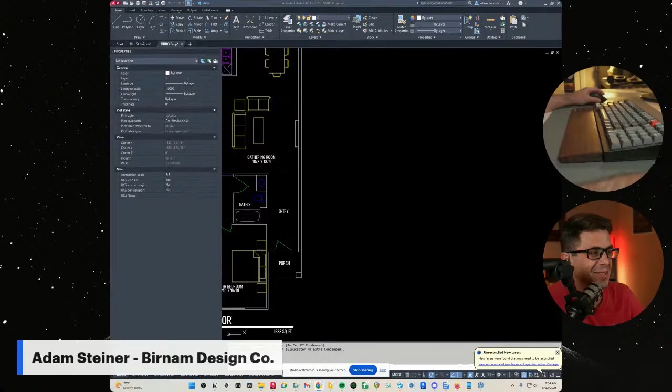Hey, for those of you jumping on Instagram, thanks for jumping in. Good chill morning, I actually just woke up. I didn't set an alarm today and figured, I don't know, my family's usually up pretty early, so it kind of just wakes me up by osmosis. But yeah, I didn't get up till like, I don't know, 7:45.

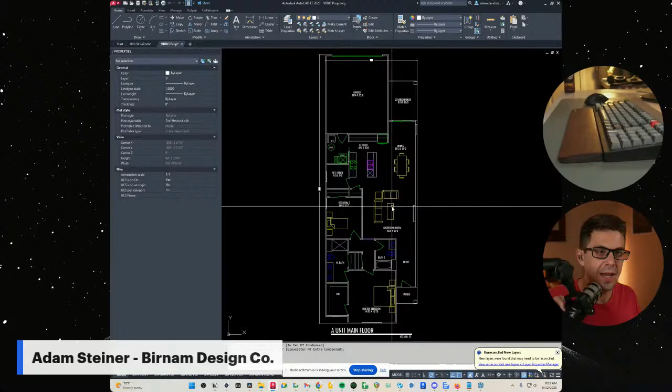Getting ready to start a new kitchen layout for a client. I assume, so I get a lot of requests for remodels and stuff for kitchens, and it's really hard to do remotely, and they're just generally hard work. Like with something existing, it's harder than something new, for whatever reason. So mad respect for working in new kitchen layouts, unless it's just a new plan, just you're a kitchen designer, which is entirely possible.

How do I see the chats in Restream? I swear I've done this before. This isn't my first time live streaming, I know how to do this, I think. All right, I need a sip of coffee, I literally haven't had any coffee yet. Did I say I just woke up?

Okay, today what are we working on? Glad you asked. I have this paired patio ranch plan, this is the one up on the screen here, or Rambler as they call them in Minnesota. And the original version was to pair this alongside a 2-story home. And that worked, and it led to a pretty cool looking building. But I don't want that up. Oh, where's it? Okay.

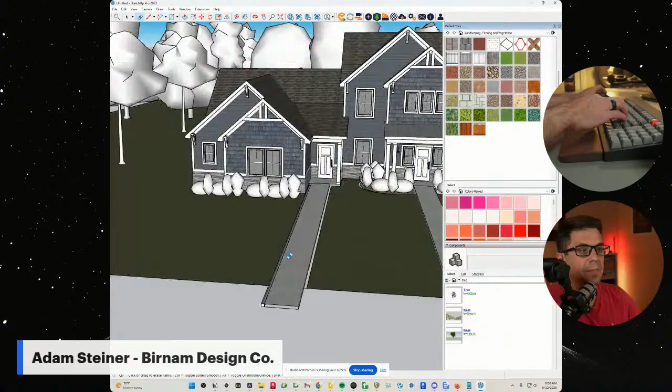All right, so this is the 3D of what we had. You can see here the ranch plan paired with the 2-story. Personally, I like the look of it. I feel like it didn't lend itself to looking like really high density, which I think is good. I don't think anybody wants to live in a place that's like, oh, we really packed the houses in here, you know?

So trying to get the feel like there's space and uniqueness and stuff. So I know I could just take this and flip it on the demising wall and just do that. What I don't love about that though is, let me take a step back. In this unit, the 2-story wall ended like back here somewhere, and then there was a patio. So this window actually just kicked out to open space.

So it got a little more natural light in that dining space. But if we flip it along its axis, just do that, then that window goes away. And really, your main living area, the kitchen, everything, the only natural light you're getting is here. And it's kind of trapped between these covered porches, which I don't love. So I wanted to try something different.

Our sites, when you're working on, let's start here. When you're working on duplex designs or paired patios, anything with density, the sites can be really rigid and also very unique from job to job. Like you can't, it's kind of hard to buy a floor plan of a 4-unit building because you don't know the size and shape of the lots, and it gets really specific of what you can and can't fit.

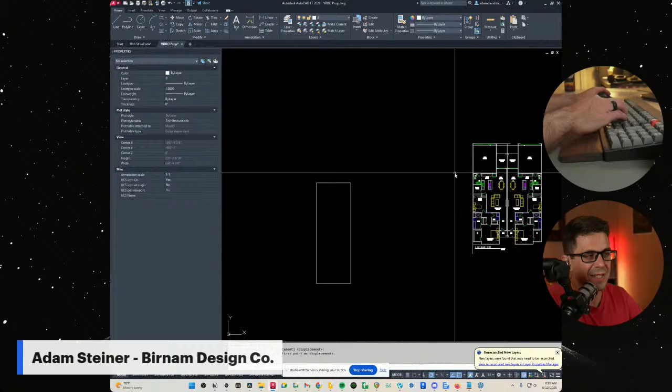So I know this building pad works, I'm going to work within this. We've pretty much maxed out our buildable area on these lots from this perspective earlier. And then, so yeah, I know this footprint works, but you need to really pay close attention to it if you're designing like this.

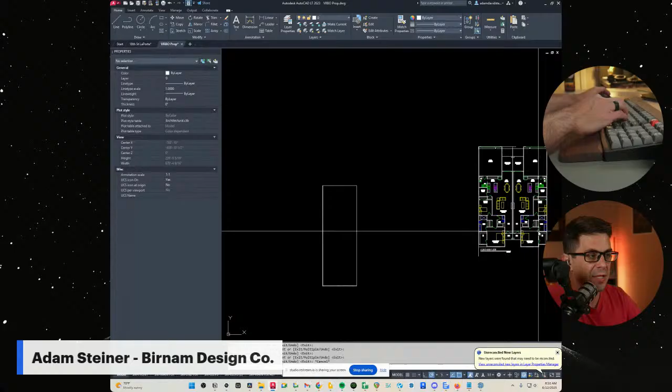This is for a builder, so I know they do 2x4 exterior walls, so we're gonna start there. I'm actually gonna try something here where instead of putting the master to the front, I'm gonna put it to the back and see if I can make it work where all the living area is to the front of the house and the bedrooms are to the back. I don't know if this is gonna work, but I'm gonna try it.

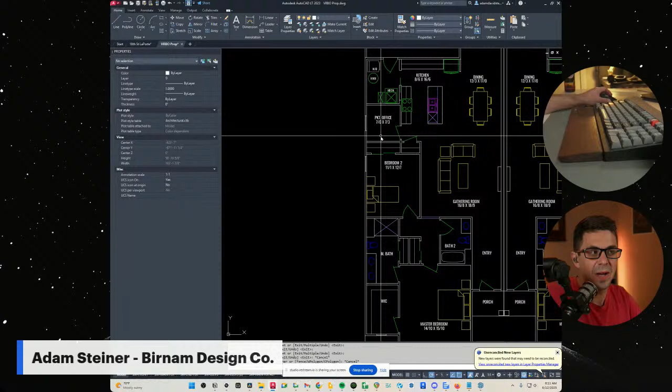We did get a lot of space out of this original unit, 2 bedrooms and a little pocket, 7x7 pocket office, or maybe that turns into your pantry, depending on how you want to use it. But you do have a pantry closet here as well. So yeah, you could do either.

I always do that. F1, I need to change F1 in AutoCAD because it's the help button. But at this point in my career, I'm not really pressing the help button for help in CAD.

Okay, I like this footprint too of the front of the building. So I'm going to pull that over as well and work off of that.

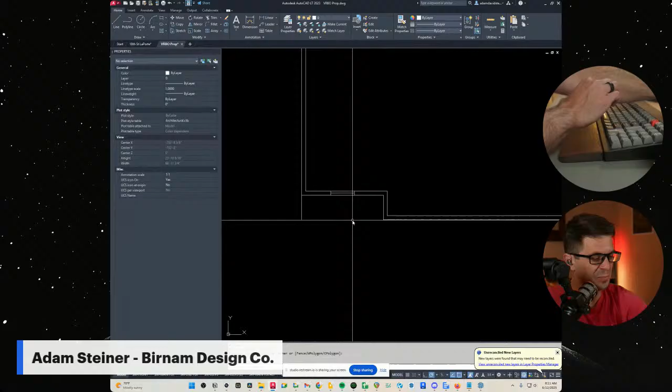I have to sneeze. Sneezing during lives is the worst. Nope. Okay, we're back, we made it. Oh, goodness, all right.

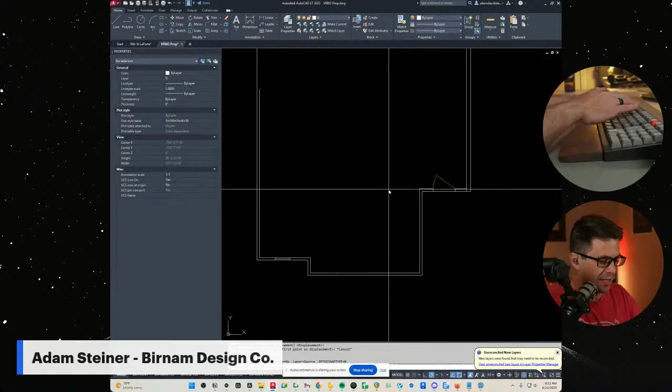So I can play with where this wall sits too. I like the idea of a porch of some sort, it just feels a little more inviting. I can't extend that porch past the front wall of the house though, I don't have room on the site. I could pull it forward a little bit.

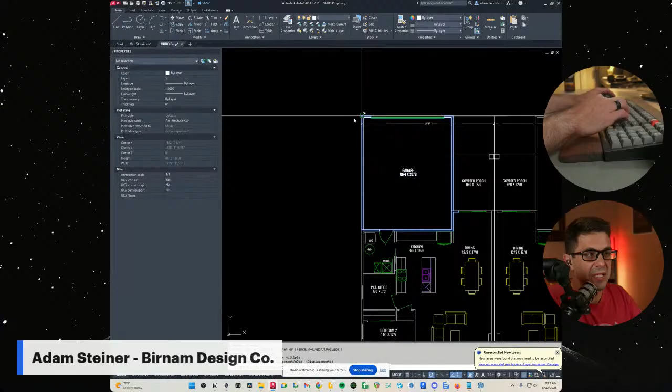And then garage. So this is back to the specificity of building sites when you're working with pairs and duplexes and stuff. This is an alley loaded site, so all the garages are to the back. I actually really like developments like that because it lends for just a lot prettier streetscape, in my opinion. Getting the garages out of the way makes all the houses look cuter. It just does.

All right, let's see here. So let's say for this alley side, we don't need that bump out so deep in this version either. Let's bring it in a couple feet. All right, let's go 14 by 13 with a little bump out for the master. Let's see where that gets us.

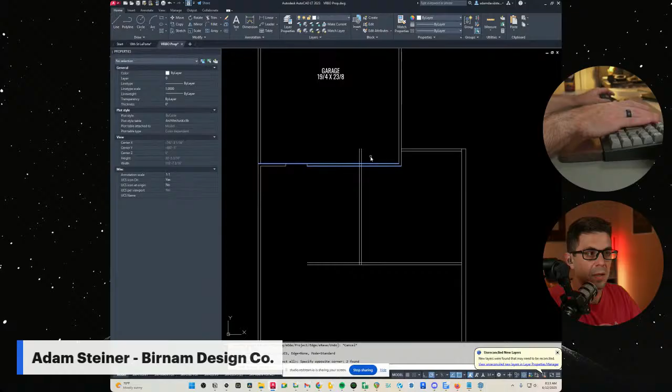Need to preserve some sort of access area for the mudroom to get into the house. So yeah, this is why. Okay, immediately now I'm like, this is why I put the kitchen to the back, because to get from the mudroom to the kitchen is going to spend a lot of space in hallways and stuff if I do it, but let's try it just to see if there's a better way to lay it out.

I'm going to increase the size of all this text so you can read it.

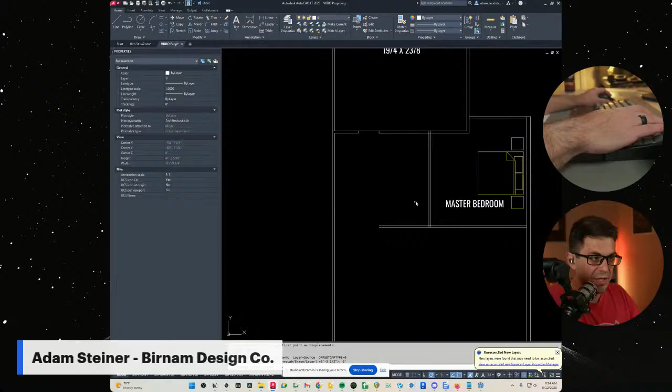Okay, so my first inclination is to put the mudroom more toward the center of the house. I feel like if we do that, we'll end up wasting less space on hallways later. But if we make this mud laundry, caps lock on, if we make this mud, that means I need at least 6 feet this way for closet, bath, maybe more even, honestly. Okay, and then what does this space get used for?

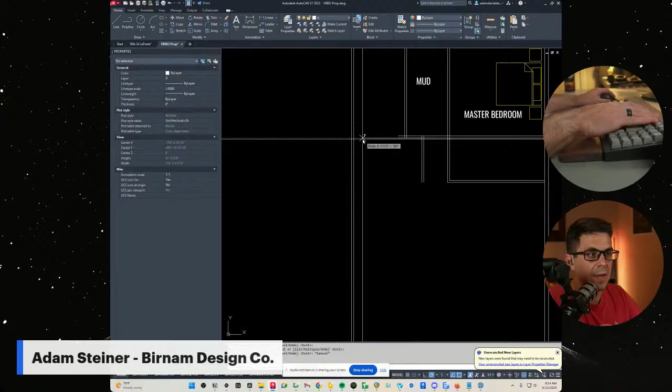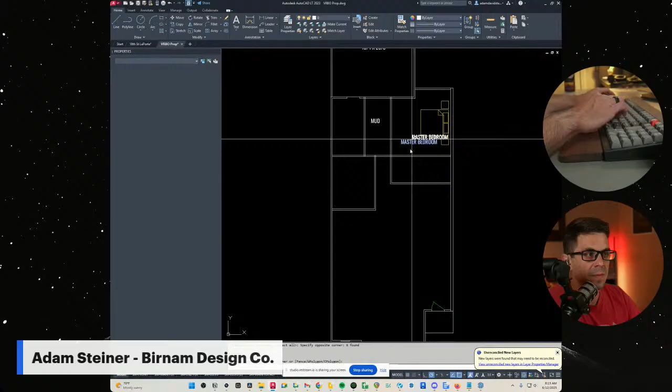So let's see here, at least a 42-inch hallway going in. And then over there, okay, 10 feet is enough for a small bedroom, so we could do 10 by 12, 10 by 13. Let's start with 10 by 12. These are pretty small units, so I'm not super concerned about having the world's most giant bedrooms. No one wants small bedrooms, but I think if people were to sacrifice space, it'd be the first place they'd think is that hall bedroom. Okay, so this is bed 2.

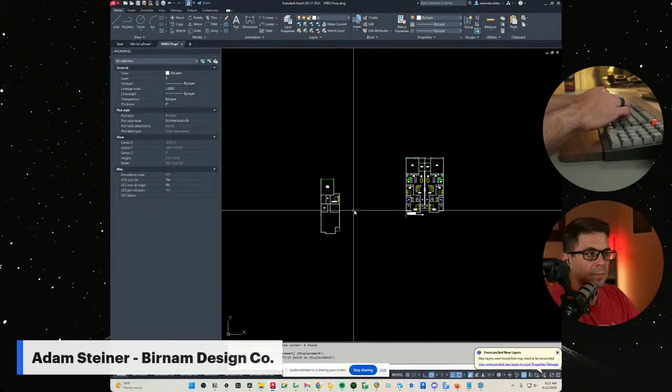And then, you know, maybe that master suite comes out over here. We need a hall bath, we need mechanicals, we need a living space. One thing that's nice though about putting everything to the front is there's less space wasted in the hallways with like an entryway and stuff. Like this entry is kind of buried in here, whereas now we can open to just the main living area.

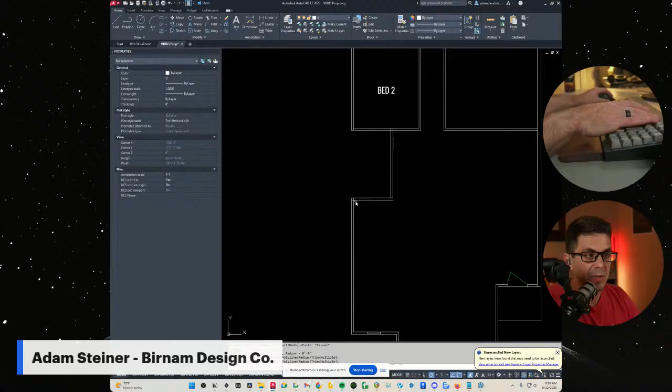So let's see here, where would I want what? I think even though it's like a modest side yard, I think you'd want something, maybe even like we have to pull that in some for a porch area. So let's show like a 6 by 10 recessed porch into the unit, which I know adds a little bit of cost. It doesn't need to complicate the roof though, because we'll cover all that. So notching all that foundation, yeah, is going to add some, but not a ton because you're not notching the roof as well. You're also taking away square footage, so it's balanced-ish.

We need to move that all a half inch.

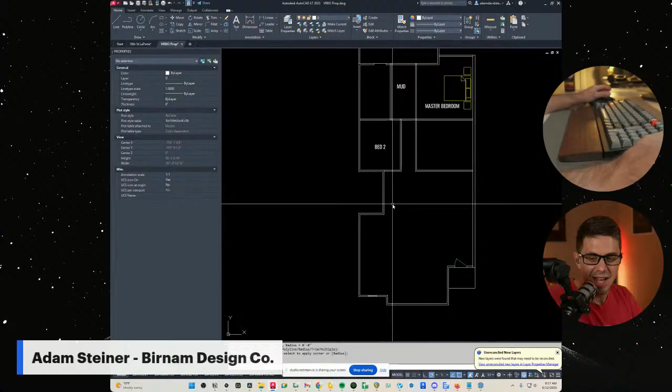I've noticed, just over the years of doing a lot of AutoCAD, I get very picky about halves and small bits of an inch. Sometimes when I draw something very slightly askew and then go to dimension it, the dimension line comes out as 4'3" and a 16th. It's like, okay, crap, I never intend to draw in 16ths. So where did that 16th come from? Then you have to go back through and figure out which line is askew. That's real annoying.

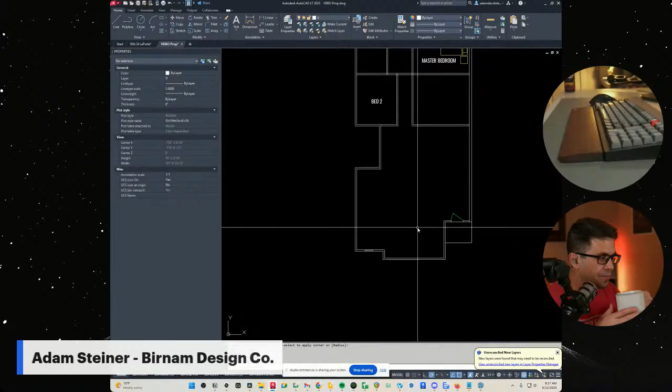A lot of times when I'm designing, when I'm stuck, I'll just start putting stuff down and see what happens. So let's just put the kitchen in this corner and see if that feels right or bad.

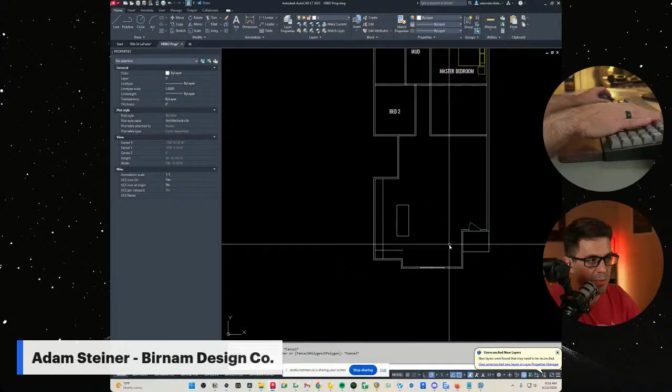I like that. If we put the sink here, your field of view when you're walking in is this way, so you're not looking right at the sink. I know aesthetically we're going to need a big window or something on this wall. I can play with where this wall is too, but I liked the balance of the previous version, so I'm not dying to change it if I don't have to.

We could just go giant island, giant great room. Why do I feel like I have so much more space in this? Am I missing something?

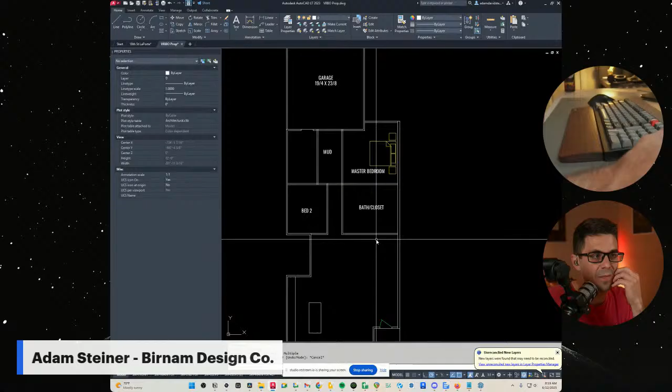That's plenty of room for a bath closet—I'll show that a little later. There's plenty of room for a bath closet. We could do the hall bath here and then do a powder bath, although that's adding extra cost, so we don't need that. Let's try and keep just the one hall bath. What I'd do then is put the hall bath there, and then take that bedroom back to there, so that all equals a mudroom.

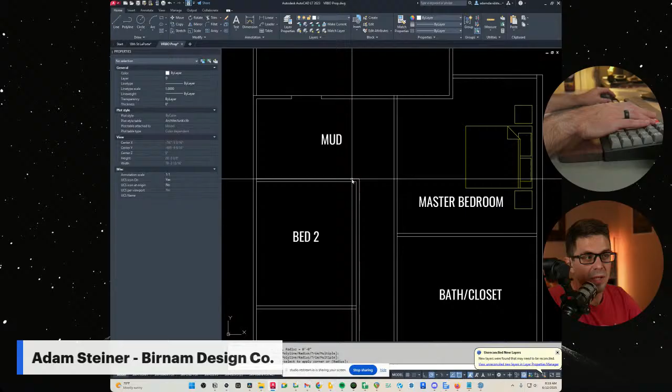With a long, slender layout like this, you're going to have some hallways—it's just kind of unavoidable. We got a bigger mudroom though. It's bigger than our last version.

We have a lot of floor area here still, but we don't have that pocket office. I do like this little covered patio nook here. And then rotating that—yeah, that all works.

I guess I could think about rotating it on this axis, or mirroring it. Although we need to flip our patios to this side. But the added bonus is that the master doesn't back up to another master, which might be nice. Yeah, let's play with that.

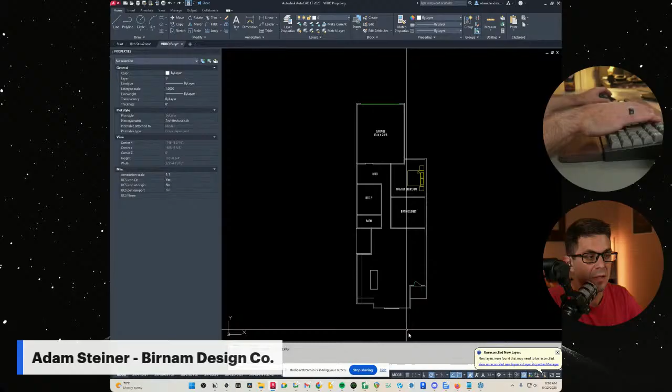A lot of times when I'm designing, I like to copy and drag things over, because you never know how an idea is going to feel until you actually try it. Oh no, wait, that won't work—our bedroom doesn't have an egress window anymore. Never mind. See, this is exactly why you copy stuff over.

I know it's not ideal to have those masters back to back, but I feel like we've gotten really good at sound insulating, and there are a lot of things you can do. Google STC ratings and wall sections—there are a lot of framing assemblies that have an STC rating for the exact assembly.

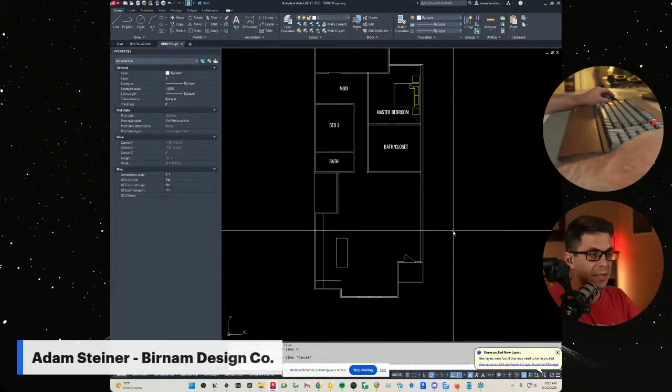Okay, so there's a lot of floor area here. I wonder if we try the kitchen somewhere else. If we put the cabinetry toward the front wall of the house, that window is going to need to be shorter, which may negatively impact our elevation. We'll play with that in a second.

Actually, we got those—did them somewhere. Did I do them just in 3D? I did, didn't I? Okay. How wide is this? That's 7.6. So if we did...

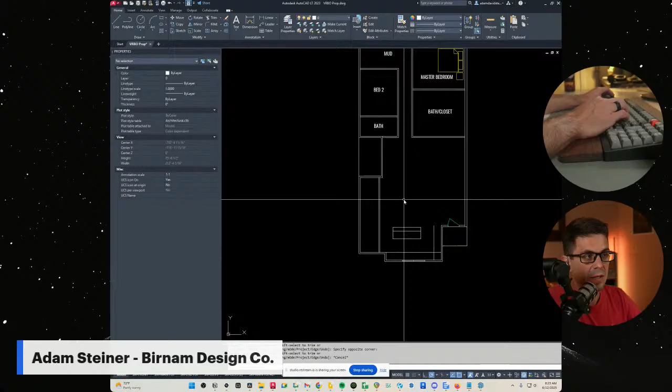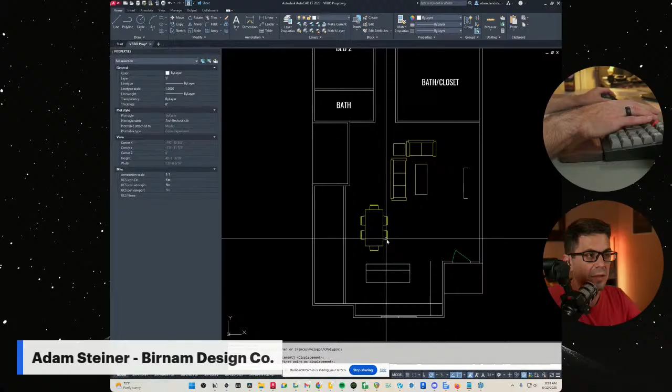Okay, and you have great room area here. Dining is kind of floating. Let's grab some—we most likely do electric fireplaces in these. Electric fireplaces have been getting a lot better in recent years.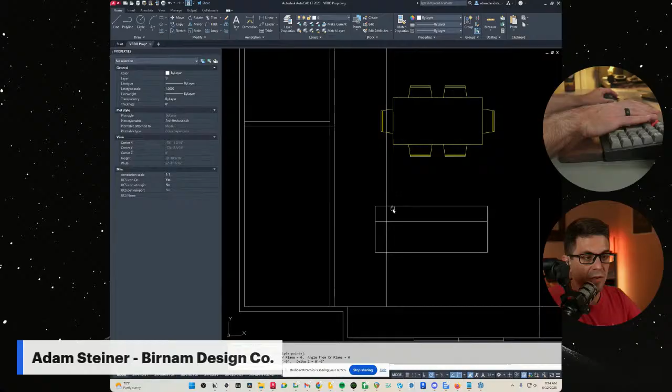You could put your pocket office here. I want to pull it back though—I hate angled walls. But we could do something like that for the pocket office, with a little window looking out on the porch to get some work done. I guess the island doesn't need to be quite that big, although rarely, if ever, has somebody told me they want a smaller island. It's happened, but it's rare.

One thing that's tricky about this kitchen too is I can't put the range on this wall, so the fridge might have to go here and the range there. Let's grab those two so we can see it as I'm explaining.

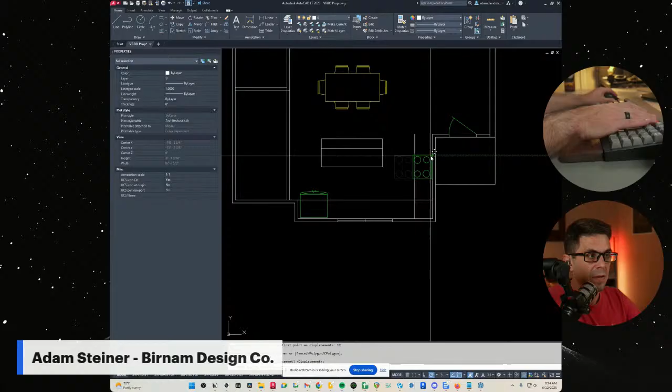So you have kind of a far distance between your fridge and range, which, yeah, I don't know that I love. That might not be the optimal layout.

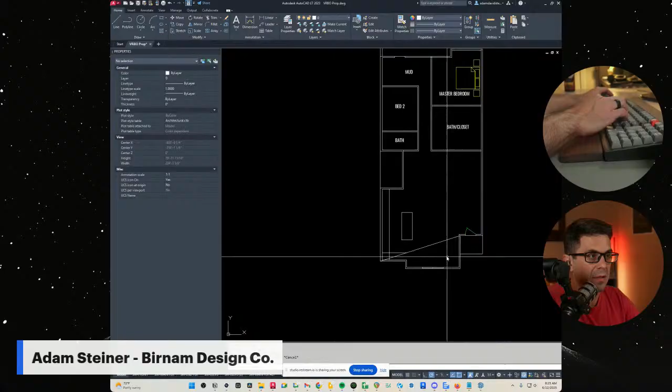Let's go back to this. Let's try something here. Let's flip our main bump outs. Oh, no, wait, not that. Still this one. But we're going to flip our main bump out.

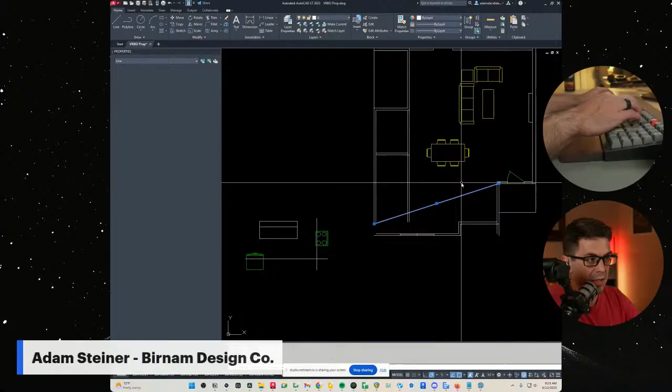And put our pocket office up here by the front door. Maybe we even make that a couple feet deeper. What do you say?

Okay. Or maybe this goes here. How big of an island are we getting that? Oh, yeah, good size.

Okay, don't hate it. I know most people would say put the kitchen sink under the window so you can see out the front yard. This island is 6'2" by 4. If we leave it set as is, I can get a giant kitchen. Actually, that kind of doesn't help with cost.

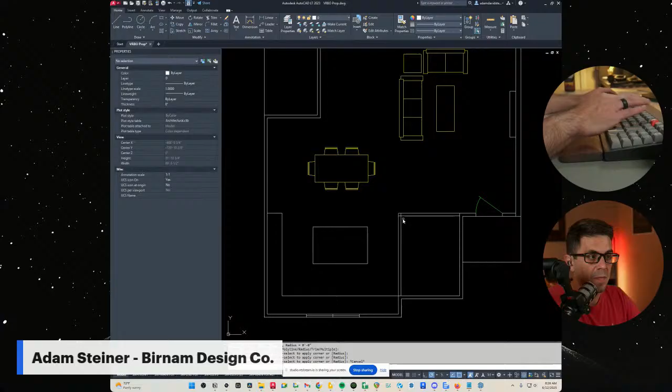It's borderline too big. But we get our office here. That'd actually be kind of nice. That office ends up being a good size too, almost bigger than the previous version. I could get the lines clicked in the right things. 6'7" by 8'8", that office.

Yeah, I mean, again, with this type of plan, we're not going to get the biggest ever office layout design, but at least we can get a usable room out of it, which is cool. Let's grab some text.

You are kind of walking right into the kitchen or the great room, but you don't see the sink right when you walk in, which I think is a positive. Kitchen you could lay out a couple ways. You could put the sink on this front wall, or put the sink in the island, or put the sink in the sidewall. Although, no, take that back. You're going to need that sidewall for the range.

There's really no other good way to lay out this kitchen. And then you have room. Now we've got a little flexibility with the fridge. You can put the fridge on this end here. You have room to do that. And then this all becomes storage.

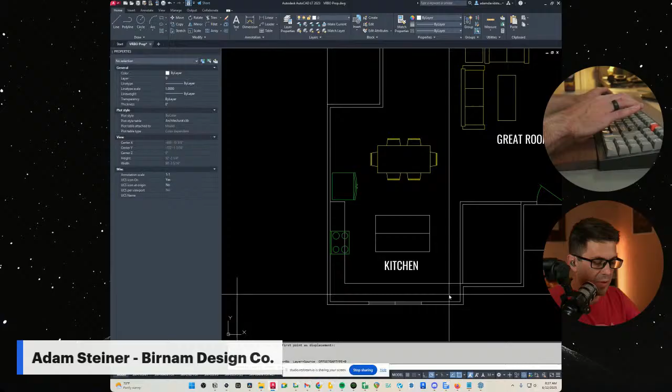Yeah, we probably end up doing a pantry cabinet here so you can preserve that as office space. Don't take this walk-in pantry. But I still kind of like the idea of—

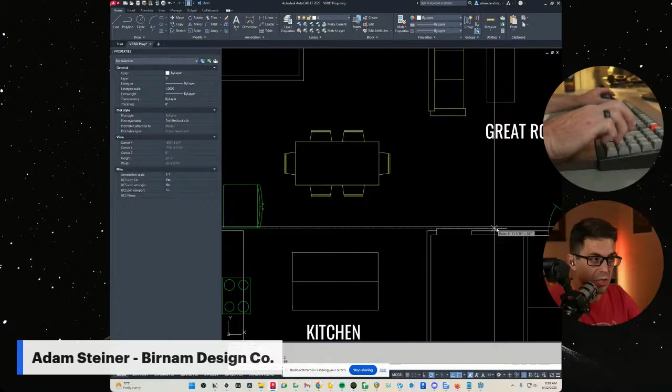Whenever you're doing spec units, whether that's true spec or you're building rentals and things, I think flexibility is huge in these spaces. So to have this room that could be an office if you want to throw shelving in there, could be your pantry, could be your coat closet—it serves a bunch of purposes, and I think that's great. You really want to aim for stuff like that if you're designing spaces like this.

So obviously, you don't know how people are going to use it. Okay, then we got our cute little side porch here. Yes, it would kind of be looking right at a neighbor, but you do have the side yard here as well. So—

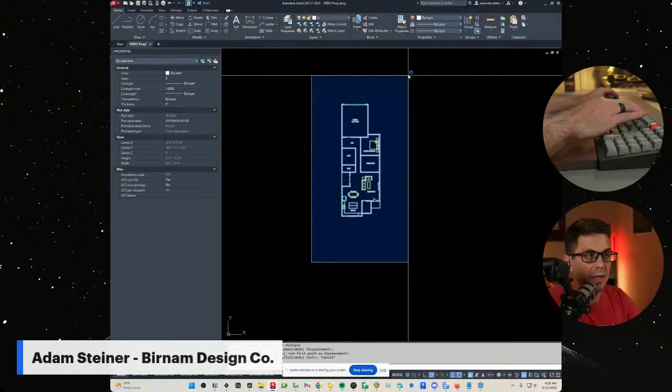I wonder if we could even stagger these units as we build them on the sites. You know, let's do like a potential site plan down here. So if that's our party wall, neighboring plan, maybe the neighboring plan's right there, so the patios aren't right into each other. And this version goes back again. Yeah, could do something like that.

Okay, what was the one I was working on? This one? Yeah, okay.

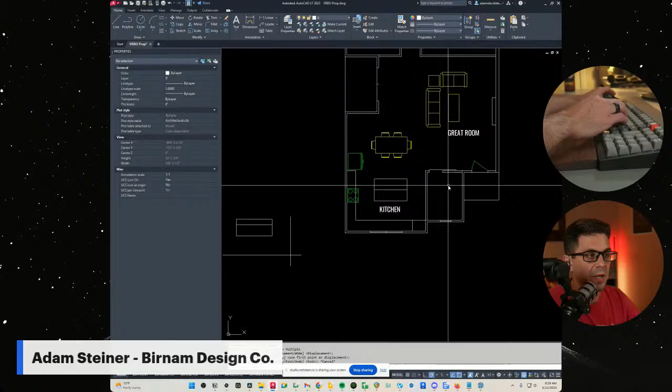As far as roof goes, I think we did—I would probably do a back patio on these two. Maybe covered, maybe not, but just so you're not throwing away that backyard space, I think it'd be nice to go for the masters out there. We got a little office. This is dining, obviously.

Got distracted by the song.

Oh, sorry. Okay, so I was going to talk about roof lines. So I really like the idea of a clean, simple roof that sits over all this. You can spring it at the back line of this pantry if you want.

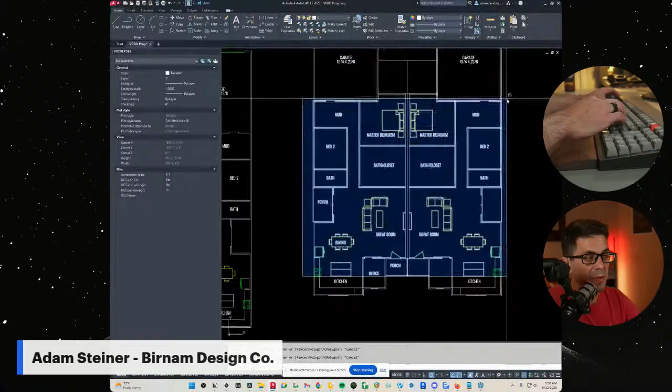And this will most likely be truss, but this is a very simple truss roof. You spring it at like the front line of the front porch. You'll have a girder truss this way that will catch front gables, and this way, those big solid white lines that I just drew—so that girder truss catching that. You'll most likely have a girder.

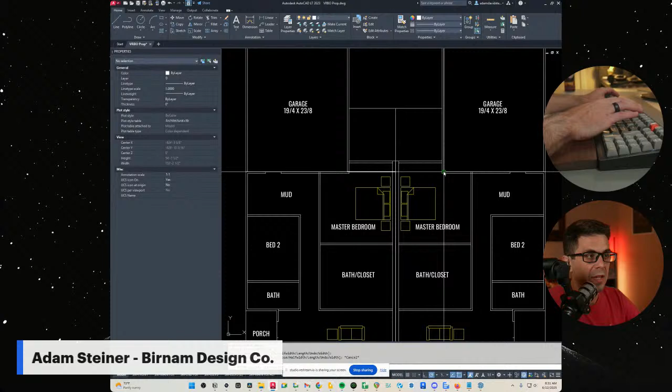No, this will probably be an add-on because I'll probably do this as a shed off of the main roof.

Jeff Sawyer joined. What's up, buddy? I haven't talked to him in forever.

He probably was not ready for a call out this morning.

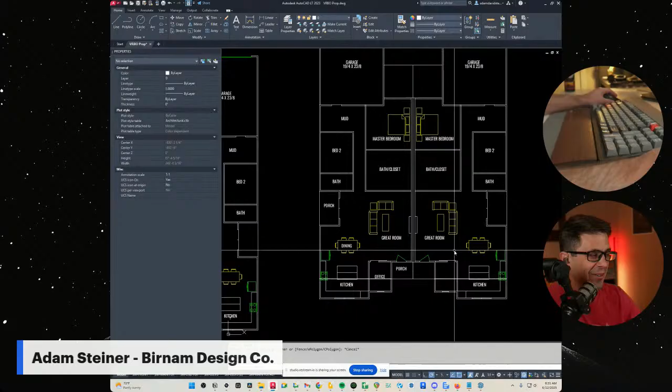Oh man, okay, so let's play around with this some in 3D. Let's get our 3D software back up. Yeah, so I had these saved, although this is a little too much detail to really work effectively from, so I'm going to need to rebuild it.

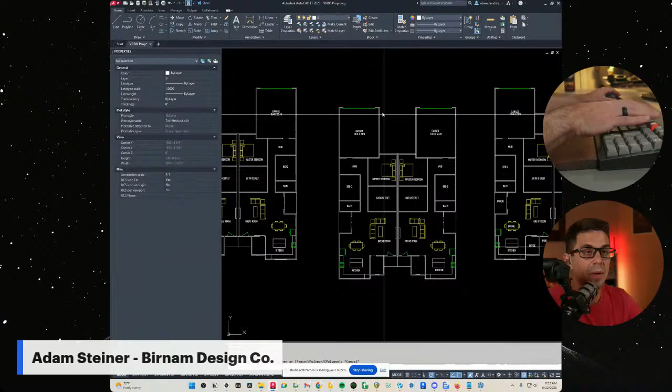Because mirroring all that crap will take forever, I'm just going to rebuild it. All right, let's grab an open file. So we're gonna open the VRBO Prop SketchUp file.

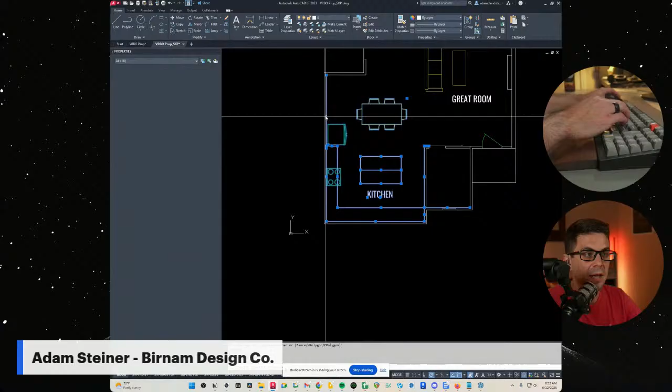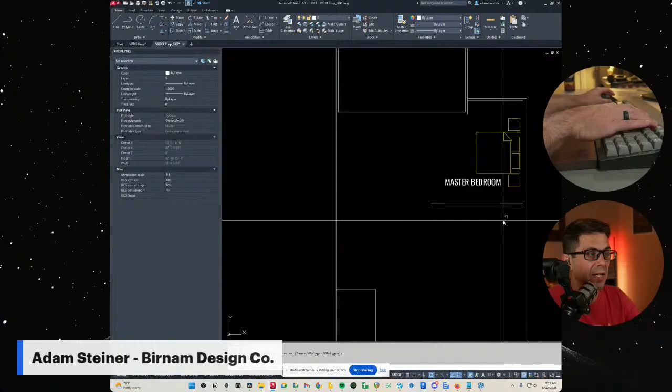All right, and then we're just gonna delete all the interior detail that we just worked on. Normally in plans like this, I would go through and develop the master bath, the master closet, but I know we have plenty of room for that stuff. We have more than our last versions, so I'm not worried about it. I have an idea that will work and a couple others that we can try.

And also, it helps to know if something looks good in 3D before you spend too much time developing the interiors. That double line, we don't need that. Okay.

Let's save that, and then we're going to import it. Drive. There we go, okay.

Then I'll usually explode this, I'll group it later, and make faces with those.

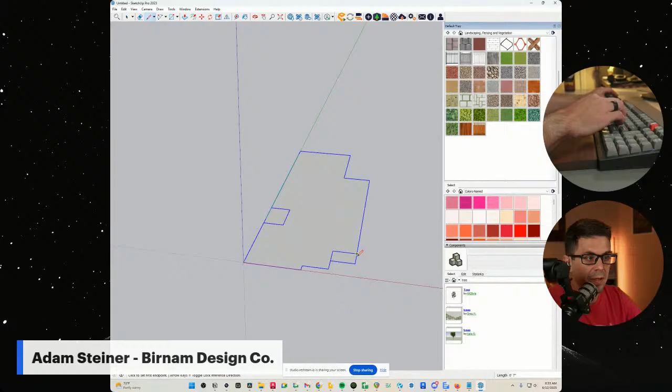Okay, so top of foundation, these are slab on grade, so top of foundation will be 8 inches up from grade. We got 9'1 and an 1/8 top plate. We can really just work off of that.

These patios would be 4 off of grade. And then, yeah, I'll do no overhang on that center line, group it and mirror it so we can see it all together.

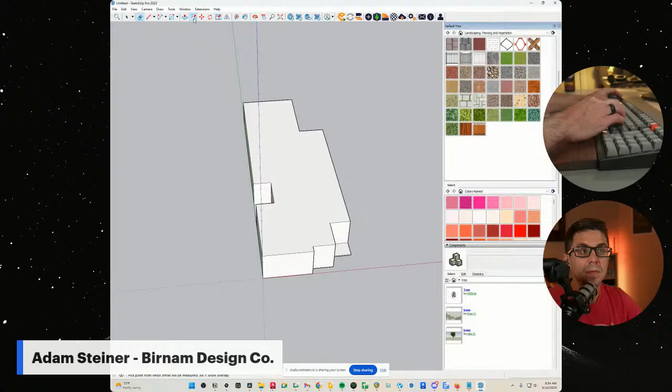Yeah, let's do 12-inch overhang on everything. Cut through there, just gonna bump up 6. If you're doing trusses, that usually bumps up. If you're doing rafters, it usually bumps down. But it's for rendering, I'm not, it's within inches, so I'm not super concerned about it.

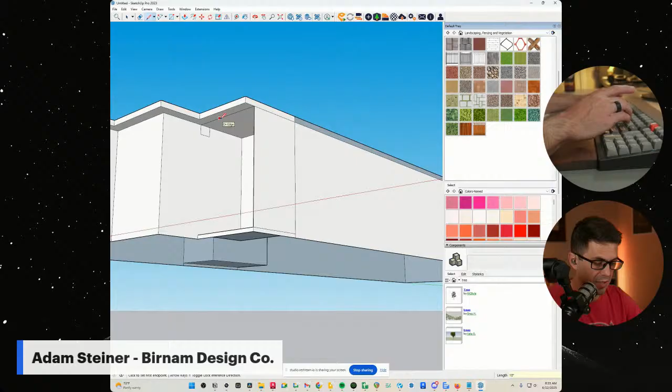This porch will be covered as well, so let's bring that out a foot past. We like to do headers here, it just adds the look and feel of, makes you feel more sheltered as you're walking in.

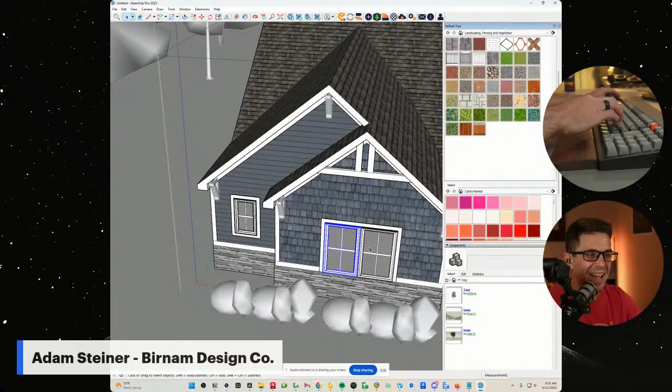Yesterday I was experimenting with PromeAI. I feel like it's getting way better. I go back and forth on whether I should be excited or terrified about AI. But it was cool because I was pulling up stuff, and for the first time I felt like, okay, a plan that I developed,

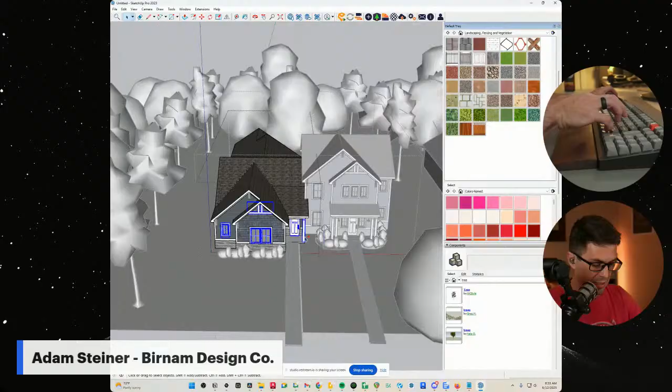and then I would put in there just to get, I'm just looking for architectural styling. I don't want it to design a building for me. I just wanted to take what I designed and make it look more like hand drafted or something. And so for the first time ever, I felt like it was something I could send to a client.

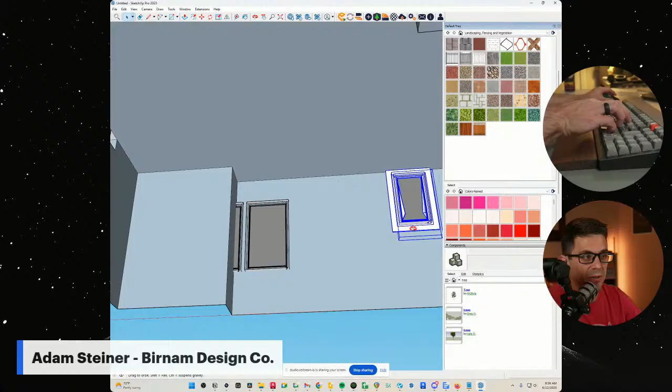Most of the AI stuff I've used, it looks cool, but I'm like, I can never send that to a client because it altered the building way too much. It just didn't keep any of the original intent or character, or doesn't match my floor plan at all, and I can't send that - just here's a thing an idea an AI made. But for these, I was able to do some pretty cool stuff with it.

See if I can pull up the ones I was playing with yesterday. Sorry, this is a total tangent, but MySpace - anybody have a MySpace? Am I aging myself? My assets? There we go.

Did those. Where are the ones I made yesterday? I can't find any of this stuff. This is just a reminder that I'm getting old. Maybe I can pull it up another way. I'll put my email on the main screen. It is, yep, okay. That's fine, joys of a live streamer.

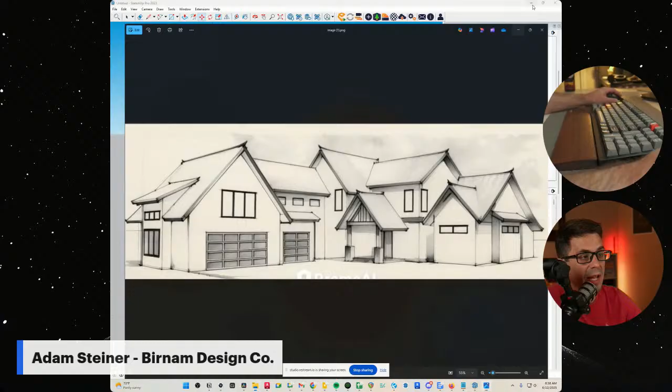All right, but I do have one, pull up here. Let's see. Okay, so this is the image I made, it actually matched my geometry pretty well. But obviously I didn't hand sketch it - I modeled everything in SketchUp, just ran it now, input it, and it all spat that out. So it's kind of cool, maybe we'll do that for this one as well.

See how it looks and feels when we're done here. All right, so let's get back to the model.

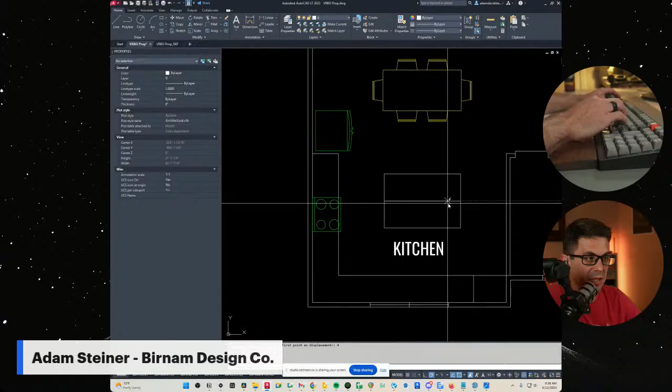These windows in the front need to be a little shorter. I know that because there's cabinetry there. I don't even need to make the decision yet on, is this 24 inches deep, why is that only 20 inches deep. I don't need to decide yet on kitchen sink and island versus the window, because I have room for both. Actually, now that it's 5'10, I'm going to put it on the window because then I can put my dishwasher right next to it.

We're going to explode this, I think, and then we're going to make it unique. We're going to cause this to lose a foot - that's a 4-footer. Bring that up. Okay.

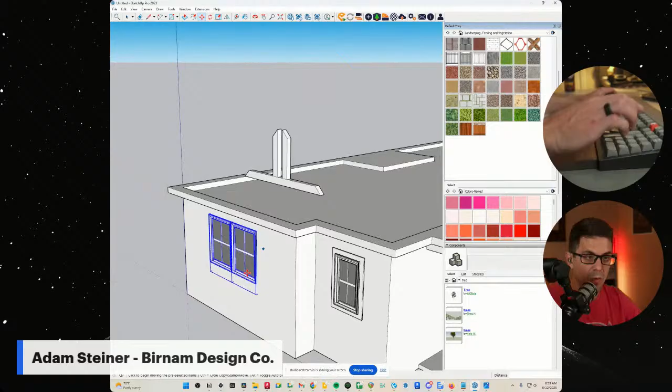Then we'll look at that midpoint. We're going to come down 12 inches. Top of the wall 1. Cool beans. Get this trim over.

And there we go. Oh, lost my Instagram feed.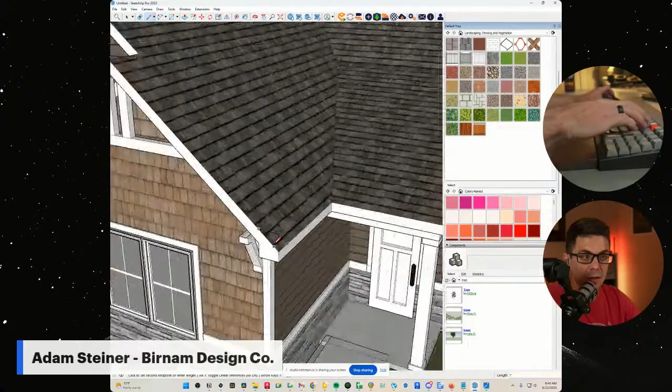Okay, let's do, I think these were 8/12s. I just want to match the previous version. Oh no, those look like 10s. Yeah, oh wait, 10/12. Okay, let's do 10/12s to match in those front gables. They're small too, so we can add a little bit of height to them without adding a ton of cost. We're not covering a ton of area.

Then we'll do a 6/12 front to back because it is kind of a big roof and we don't want it to be massive. That'll all blend nicely, I think. Personal opinion.

Put you on later. Copy these lines over. Once you have your pitch lines, it gets pretty easy to develop this.

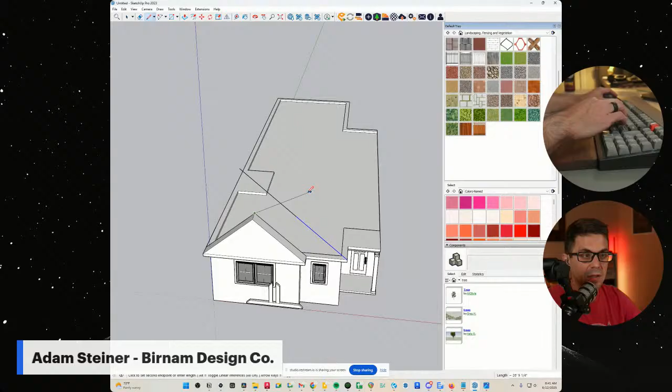Okay, and then that is going to push back to that face. And bring this to match. And then we'll do our main gable, so this will be the thing that carries the main roof.

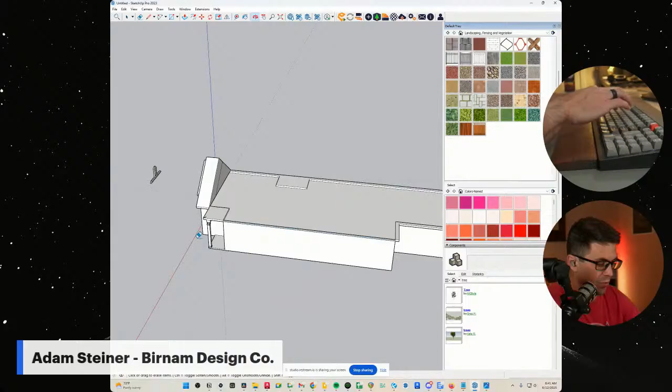One thing that adds expense to these scissor truss roofs, which you really can't avoid—I can get creative with it—is they're all usually piggyback truss, which means that shape is too big to fit on a semi, so they need to assemble like a 2 or 3-parter on site, which just adds to the cost. You're shipping out more pieces, more material, more labor.

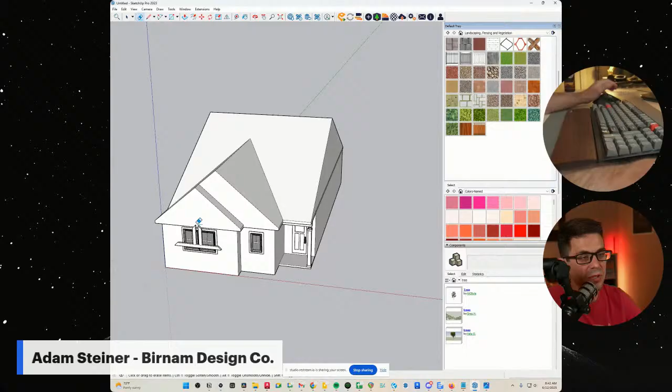So if you can keep it—I think it's around 12 feet, I need to double check that measurement—but if you can keep your trusses total height under 12 feet, usually they can fit on a semi, and that'll help you with the cost.

Doing 6-inch fascia here. What did I do for bird boxes? I just did the standard ones. Okay.

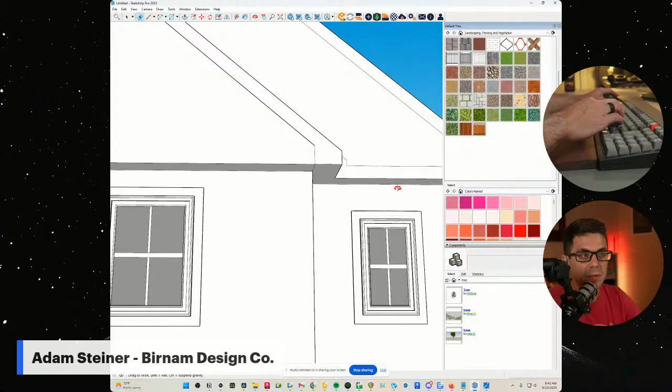Up there and there, delete all that. There and there. Let's push that back to the face.

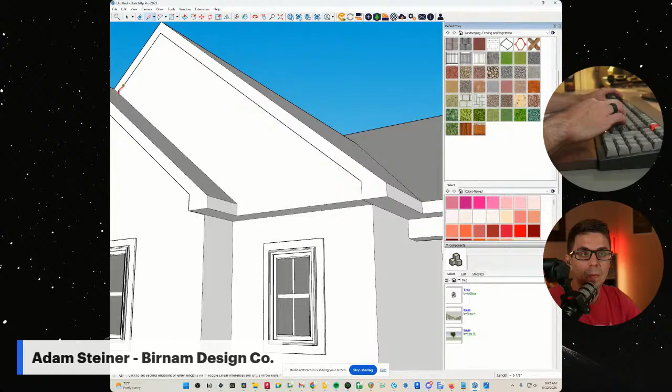Yeah, I'm gonna throw this in PromeAI too and see what happens. Should be fun. I'm meeting with the builder right after this, so I'm excited to show them these, see if they have any feedback.

All right, we need to make sure that's at the center point. Where'd it go? Sometimes SketchUp, because you're working in 3 dimensions, really freaks out on you. Is that not?

And then one of these cheater things you can do is just—all that geometry doesn't join perfectly, but because it's a group, it's fine. Just push it back into the gable, and no one will ever know, except for you, the select few that watch this live stream.

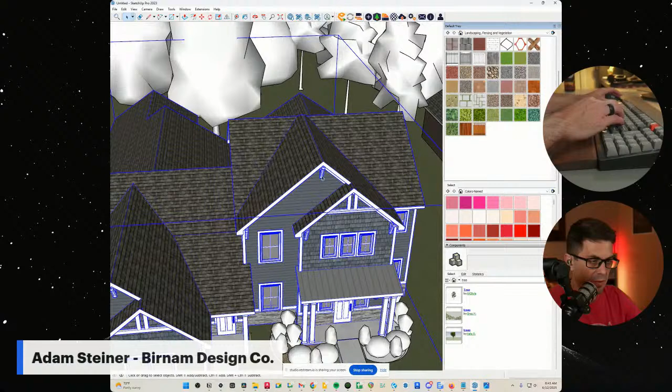Let's get a bracket too. Where did those brackets go?

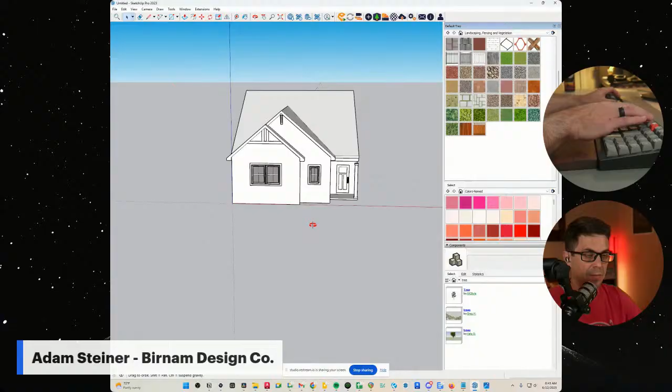Okay, this here. Okay. And just get it a monotone color. Okay.

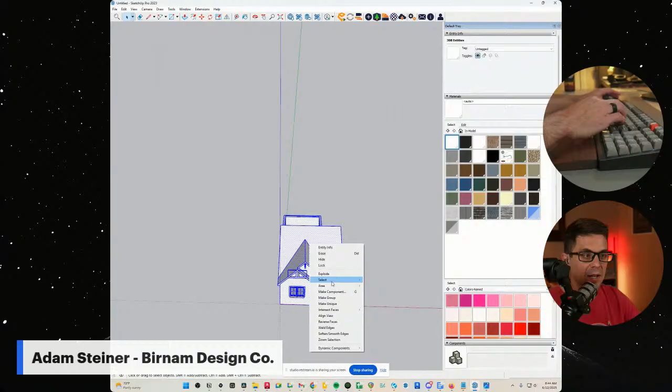I'm going to make that a group. Move it over, hit our transform button. Move it over a little more. Join those right at the roof. Okay.

Now let's take our image here and put this into PromeAI, see what we can come up with. Upload a sketch.

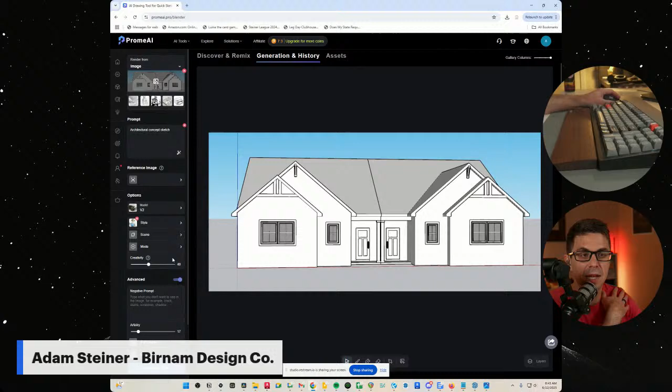Awesome, okay. So we got this, we got our style. I'm using the same style as yesterday, which was—I think this very, very sad girl. I don't know why she's so sad. Creativity 40, artistry 17.

It looks like the Instagram is frozen. Is that right? I guess you wouldn't know.

Well, let's just keep going for YouTube. Oh, that turned out pretty cool. Yeah, that's basically the geometry I had. It's not really like destroying it, which is nice.

Let's see if we do something with a little more color in it, see what it'll do.

Restream. Seems that Instagram is still connected. I don't know if it is or not, though. Sorry, Instagrammers, if I lost you, I lost you.